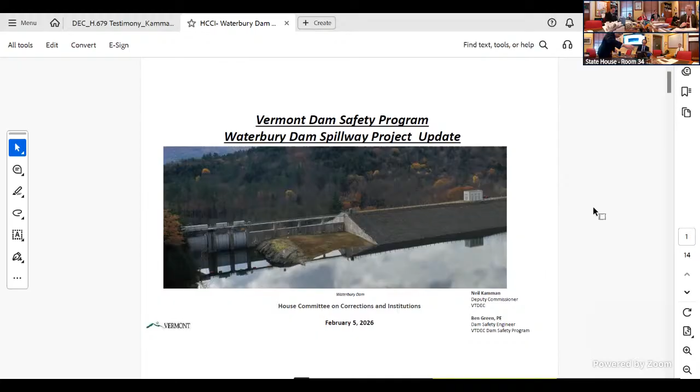So what we'd like to do today is just take a little bit of open time to reorient you to the Waterbury Dam project. And in addition to just walking through some basics around it, I actually asked Ben if he would provide some real schematics so you can actually see what is being planned for the dam and the magnitude of the project. Because I'm sensitive that when you all see a capital project that comes along and we're building a building or we're improving dams.

This project really has advanced and we have initial design. It's in design. Ben will tell you the whole deal, but we want to show it to you. So if it's too much, just say next slide, please. But Ben has provided some very informative slides in this presentation. I think it's also important for the committee to realize we're also working with the Army Corps of Engineers on this. Correct. Absolutely. It's not just us, and the bulk of the money is coming from the Army Corps of Engineers.

Correct. Yeah. So to my second to last point on this slide, this is a partnership with the U.S. Army Corps of Engineers and frankly, with our congressional delegation. So I don't think a 3-month period goes by that I don't have some kind of conversation with the Army Corps. And I don't think 3 days go by that Ben doesn't on the operational side of things.

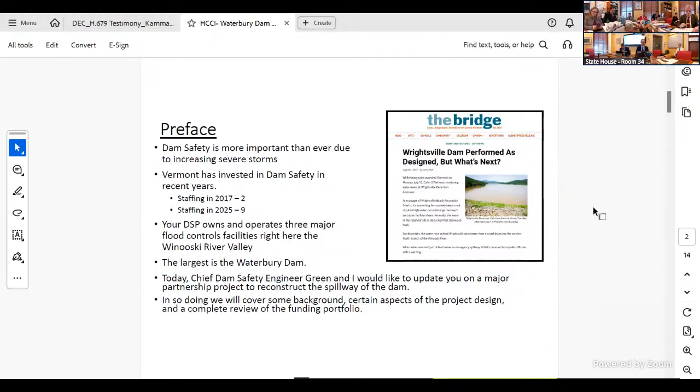So what I'm going to do here, I'm going to get out of the hot seat and let Ben take you through the overall project. And then at the back end, I'm going to sit back down and walk you through the funding stack, including what we've spent previously, where those dollars came from, and where capital and cash fund bonded dollars are right now for this project. I know that's something that y'all would want to know. So with that, I'm just going to let Ben take it away. Welcome, Ben. You're back in the hot seat.

For the record, my name is Ben Green. I'm the section chief of the dam safety program. And my team is the one that does the primary ownership responsibilities and operation work at Waterbury Dam. Hoping just to give a brief overview of the dam for those that are not familiar. Here's some aerial image of the dam and of the gate system in particular, and the spillway system that's really the subject of the project.

Waterbury Dam has a drainage area of 109 square miles. It's located in Waterbury, but the drainage area extends all the way to the peak of Mount Mansfield to the north, and it's bounded by the Green Mountain Range and Worcester Range to the west and east. The dam's 187 feet tall, making it the third tallest dam in the state. In terms of storage capacity, it's the fourth largest. So this is one of the biggest dams in the state, and as Neil indicated, by far the largest dam that we own and operate.

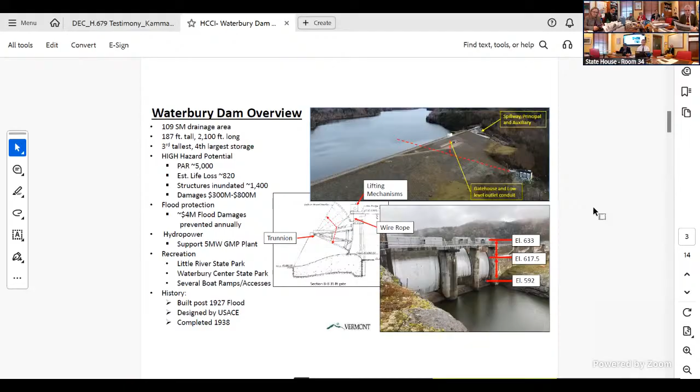Large plates of steel. Do they get tested weekly or monthly or yearly? We test operate them, typically at a minimum quarterly. They get test operated for a variety of other reasons more frequently, and they also get operated during floods. So we operate them multiple times per year. Thank you.

So the Waterbury Spillway project has really been around since the early 2000s when that gate jamming occurred, and the study was done that ultimately led to the load restrictions. This has been a priority project for this program for a long time. The project scope has been around for roughly 10 years, moving forward with the Army Corps of Engineers through initial risk assessment, then a dam safety modification study, and now we're into design phase, followed hopefully by implementation and construction.

The project scope includes full replacement of gates 1 and 2, the two smaller gates, and restoration of gate 3. Gate 3 was installed in the 1950s, so it has better quality steel and more sophisticated engineering analysis, so it doesn't have some of the issues the other two gates have. We have some erosion just downstream of the gates in the bedrock channel. It's going to be stabilized.

The spillway bridge that extends over the spillway and supports the lifting equipment is in very bad condition. It's going to be fully replaced, which means all new lifting equipment for the gates. And there will be spillway-wide concrete repairs. Unfortunately, the concrete in the dam since original construction has a deficiency that causes expansion, which has led to cracking and accelerated deterioration.

It's called alkali-silica reaction. It's basically a chemical reaction between the sand in the concrete, the coarse aggregate, and the cement paste. In modern construction it's tested for, not really an issue, but in the 1930s they didn't fully understand it. And unfortunately, this spillway has that issue.

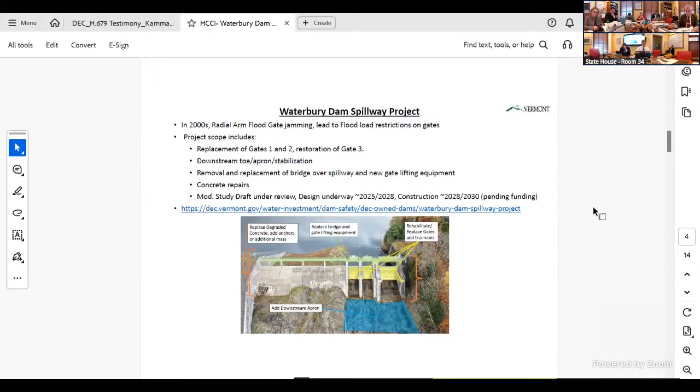So now moving on to some of the conceptual and roughly 30 to 60% design work that's been done. Believe it or not, a major element of this project is even just getting access over to the spillway. The spillway is located on the far east side of the dam, away from the access roads, and it's fairly difficult to access. So one of the first things that's going to be done in the project construction is a 30 to 50 foot reservoir drawdown, or reduction in reservoir level.

And the reason why we need to do that is essentially we need to be able to provide the same level of flood protection that we can with our gates operable during the project. Not only will we have our spillway torn apart and be in a somewhat fragile state, but we also can't be putting more water downstream and causing flooding issues during the project. So it's going to be a reservoir drawdown, unfortunately, for probably 2 years of construction.

And then the first thing that's going to happen is construction of access roads, just to get construction equipment, cranes, et cetera, to the spillway. This plan shows the planned construction of a construction access road going from roughly the midpoint of the dam along the upstream slope, and then access areas and crane pads being installed.

There's roughly 20,000 cubic yards of material that will need to be delivered to the site in order to construct those work roads alone. And just for context, that's roughly 2,000 truck deliveries of material. And that's just to get access before we even start physically working on the spillway itself.

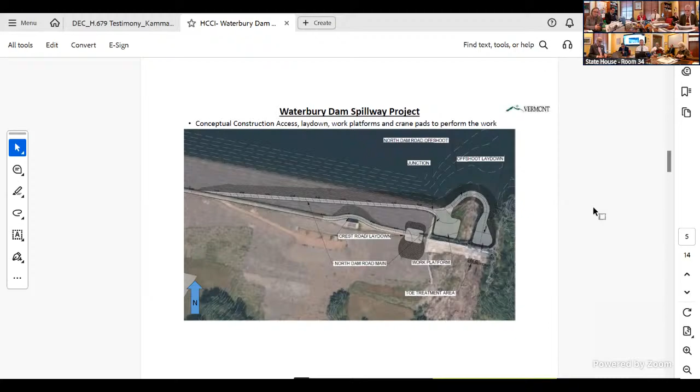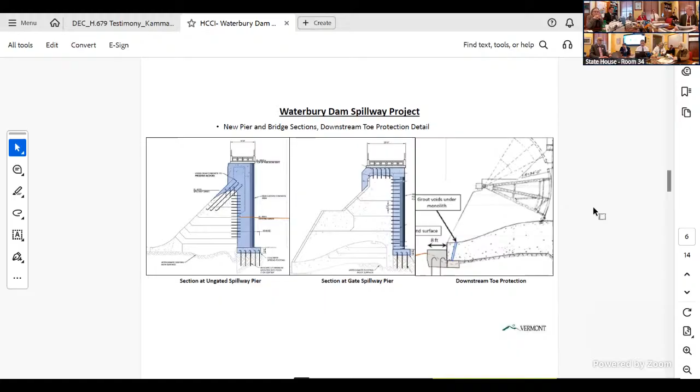And Ben, that then allows it to have the water going up higher, not the 70%, but 100%. Yep, when the project's completed, the load restriction will no longer be in effect. It'll be able to operate as basically originally designed. That's great. Fantastic.

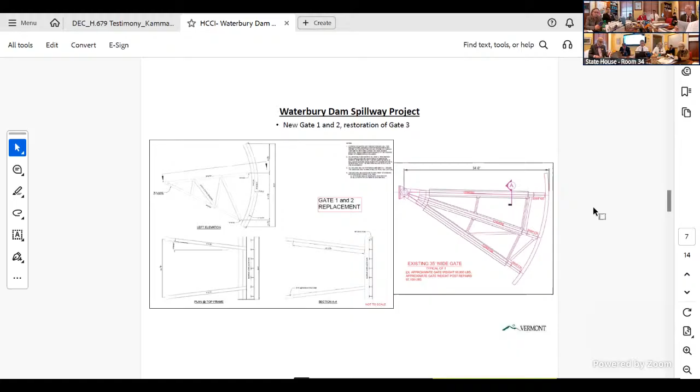The next big step is this design-level boring, coring, and soil exploration project that's planned for the spring. It's going to be a multi-week project where the Corps will have a consultant and a drilling contractor visit the site and perform boring and testing of the concrete, the concrete-bedrock interface, and the soil of the embankment near our crane pads, to get the data needed for final design.

That coring will also help us to better understand the condition of the concrete of the piers that support the existing gates. That will help to inform the degree of demolition that's ultimately going to be necessary. There's sort of two schools of thought on that one, where one is we keep as much of the existing concrete there as we can and work with that.

But the concrete has some challenges, and the other is simply demolish the entirety of the pier and build it back, which has a lot of advantages in terms of being able to better predict what's going to happen with the project, as opposed to trying to work with what's there. So that's going to hopefully give us the data to be able to make a good, cost-effective decision on the degree of demolition necessary.

So that project is weather permitting this spring. The Corps unfortunately has to be in the spillway to do this work, and that's always challenging whenever you're working in the water course, so spring is a difficult time to schedule that work, but hopefully we'll be able to push through and get that data this coming spring. So that's the goal.

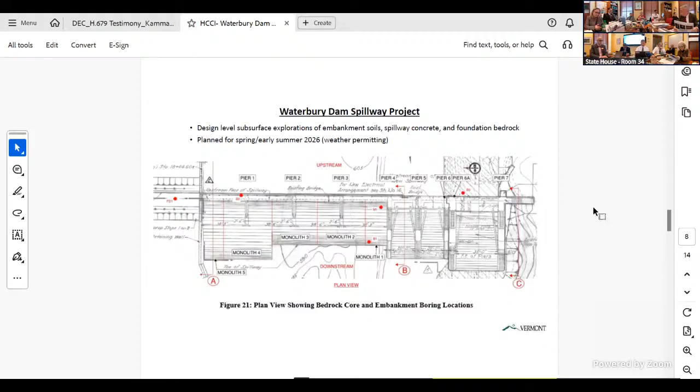Yes, so we talked a lot about what's going on at the spillway. The dam itself is a very large structure, and there's a lot of infrastructure associated with the dam. In support of the spillway project, as I mentioned, we're going to need to do a 30 to 50 foot drawdown during the project. And in order to do that, we're going to need to be conveying 100% of water, 100% of those 2 years, through our tunnel system and penstocks, which basically sit at the foundation level of the dam, 100 feet under the normal water level.

The tunnel is a 14 foot wide and 11 foot tall, arch-shaped concrete tunnel that extends from basically up in the reservoir to the intake through the dam and discharges through the buildings at the downstream end of the dam. And then that's where GMP is tied into. So we thought it very wise to do an assessment of the tunnel and penstock prior to relying on them solely during this project. They have not been evaluated in detail in many years.

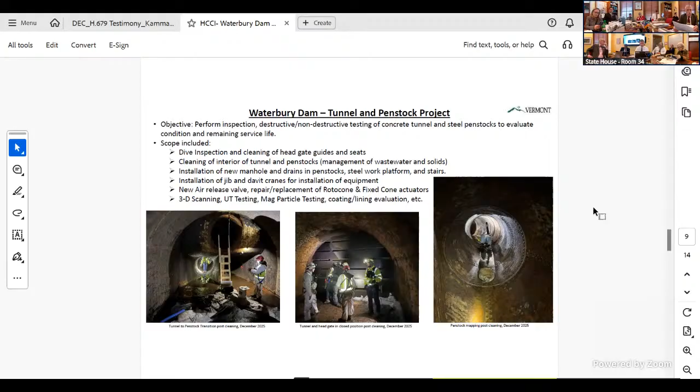We worked with our consultant to design a replacement. Unfortunately, it had to be a special ordered item given the conditions those gates have. Installation was completed in January 2026. Project cost wasn't terribly high. Design, equipment purchase, and logistics of installation was roughly 20,000, but it was a bit of a project. The EAP was deactivated following that, and all 3 gates are fully operable now. But it serves as a good reminder that most of this lifting equipment is over 80 years old. It's near the end of its service life.

We have this project kind of on the precipice of replacing all of this equipment, so we're hesitant to go and replace everything. But if you had 20 or 30 more years before we were going to do that, that's a project we'd probably be looking to do. And this is a good example that this equipment is again kind of starting to age out and nearing the end of its reliable service life.

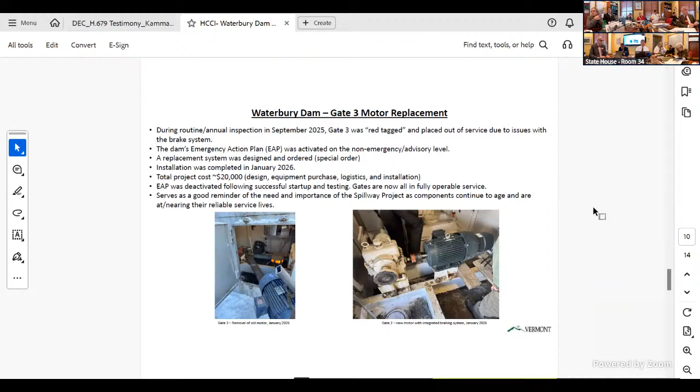But as we strive to come up to date with upcoming dam safety rules, be good stewards of this largest flood facility that we have in the state and that we own, and just become better dam owners and do a better job maintaining this facility long term. As we look at those costs from 1982 to 2025, they're put into current year dollars. Roughly the average spent over that time frame was roughly $200,000 a year in current dollars. The low we spent was $0. The high was $1.6 million.

And as we look ahead, we find ourselves in a situation where we're playing catch up. I guess the tunnel and penstock would be a good example of that. Not a lot had been done with that infrastructure in many years. And now we're finding that, while not necessarily an imminent issue, it's not too far off our horizon where we need to spend some money to keep that going. We've learned a lot about our gates and actuators and valves that wasn't necessarily passed down to us, and we're learning that we need to be doing more than we are to make sure they maintain reliability. So we've estimated over the next 10 years, in terms of just the major maintenance work, that we're going to have an annual need of roughly $500,000 a year, annualized.

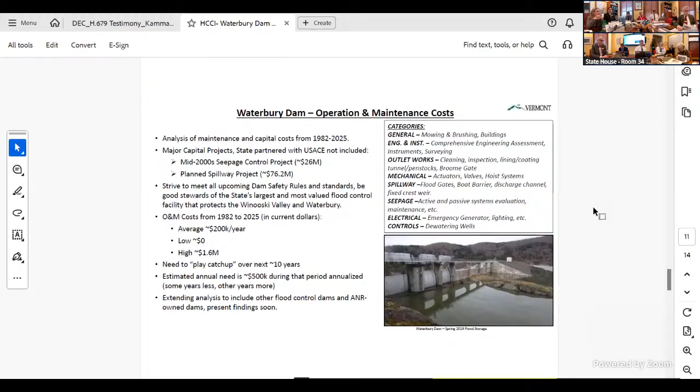Thank you. So we got about five minutes more. We can push through this. This is the important piece. Yeah. Thank you. Thanks, Ben. I love working with Ben.

It's so impressive, the magnitude of the infrastructure up there. And anytime the committee wants to come have a look, Ben does an amazing tour of it. It's a good tour in the spring. Yeah, the magnitude of it when you finally see it. Like looking down a 13-story building to the bottom of the pit, you literally can do that. You go into a little building, a little rail, you look down, and you are looking at all the cabling. It's very impressive.

So I would talk through what we have for federal funding in hand and where we're at in terms of appropriations. This slide right here does that. The cost estimates are refining on the project. About a year and a half ago, I was sweating because the number was 92 million based on their tier 2 or tier 3 cost estimate. We're up to tier 5 or 6 or something like that. So now that they've got a better bead on what exactly we're going to do, the costs are coming down. We're at $76.2 million as the cost estimate right now.

I want to talk a little bit about the cost share. There was a big success in that. The cost share for this project started at 65-35 for the very initial feasibility design that we used some state money to support. It was not capital money. This was back in 2016 when the project started. We used some Lake Champlain Basin Program money that Senator Leahy had directed to make the initial assessment happen. And then the project would have been structured as a 50-50 cost share for the dam safety modification study that Ben mentioned, and then 35-65 for design and construction, full implementation.

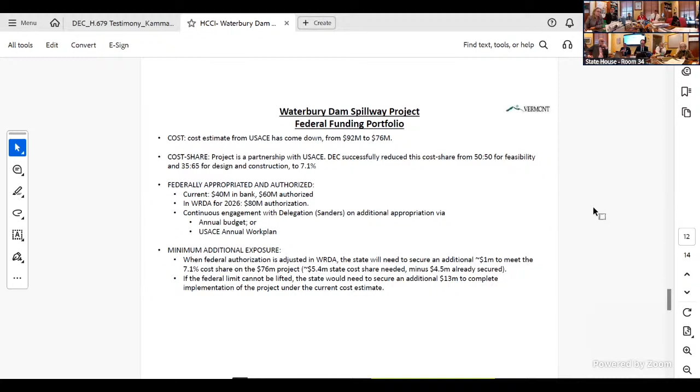And I won't take you through these numbers exactly because these are coming out of the cost share tables from the dam safety modification study report. So obviously there'll be some adjustments in there. I do want to note that we've already spent $3 million in total, 1.5 of which came from capital appropriations. So that's the first two lines of the bottom table. And that paid for the dam safety modification study.

So we've got 193,000 left to spend on the second 750K iteration that you gave us in capital bonded dollars. And that was back in 2021 and 2022, those two dept IDs. And then lastly, in 2024, in the cash fund, given all those excess receipts we're seeing, you appropriated $4.5 million. We are holding on to that for the bidding and construction. So that really breaks down the money for you.

Deputy, best I can. I didn't quite follow you where you said the 3 million. I don't know where, I see the starting. You know what? My fault. I wanted to add a different line to this table, but I kind of ran out of time last night. Okay. So if you look at the bottom table and you see original appropriation, yes, you see 743, 240, and then 750. Yes. That totals just about $1.5 million. Okay. Those were our matching funds for $1.5 million of federal money that didn't show up on this top table.

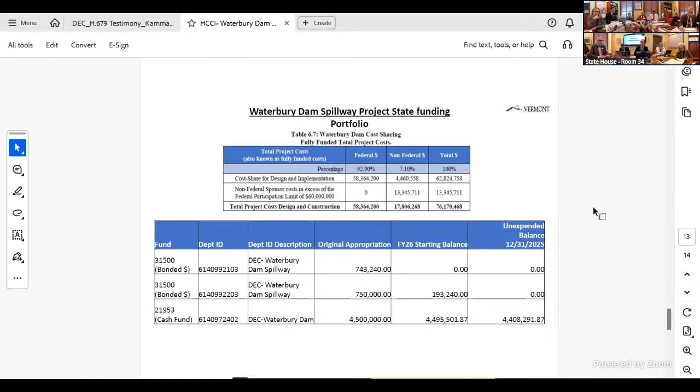What I should have done would have been to add a row on the top table that said dam safety modification study, $3 million, federal 1.5, state 1.5. That's, I just needed that clarity. Thank you. You bet. And that's the rundown.

So what the governor has put in is 150,000 in cash. Right. What is that 150,000 for? So Ben, if you don't mind, I'll answer and then you can fill in the gaps just for time here. So Ben just walked you through the penstock project and you saw the people inside of the penstocks cleaning, testing. We had a super low water year, and because of that we actually couldn't get the water out of the dam quick enough to get in there. Right? Did I get that right?

Right. So Ben's contractual team was delayed by a number of months, literally months, while waiting for conditions to be adequate to get those tunnels dewatered. And so that basically added some cost to the project. Ben is belt and suspenders asking you for $150,000 just to make sure that we get that funded and that we don't have to dip into the 4.5 in order to do it. I explained that last time. Did I get that right, Ben? Yes, that's correct. Cool.

Any questions on this, folks? Because we are running a little late. I want to bring in Michelle to talk about a definition for corrections and then offer time for the little group to get together for a while dealing with the budget.